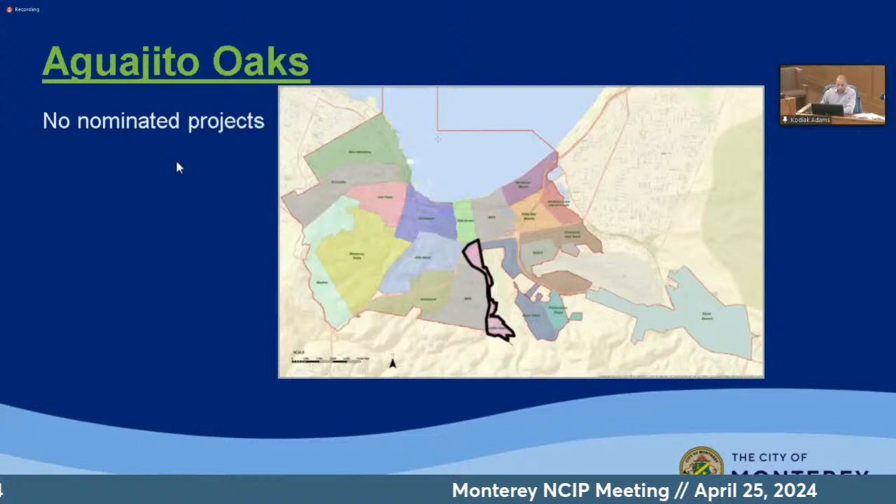All right, so there are no projects in Aguajito Oaks. So Alta Mesa, there's 1 project: the installation of a sidewalk at Alta Mesa Road from Alta Mesa Circle on Alta Mesa Road up to El Dorado, roughly 800 linear feet of sidewalk at a price of $200 per linear foot, a rough estimate of $160,000. So this is the 1 project in Alta Mesa. Does that include the 8 ADA ramps? Generally, yes, that would be included. Okay, better than I thought it was going to be.

All right, at this point we'll open it up to the general public for input and comments. Any member of the public who wishes to address us on it, please come forward and state your name.

My name is Valerie Morrow, and I'm the person who petitioned for this primarily because I live at the juncture of Alta Mesa Road and the Circle. I've only lived here 4 years, and I've been appalled at the velocity with which people drive up and down the street.

We live in a neighborhood, Rick lives in the same neighborhood I live in. We're primarily elderly people, and people walk their dogs. I'm elderly, we're older people, okay? And I was just so shocked to see that there was no safe place for anybody to walk on a thoroughfare as busy as El Dorado is.

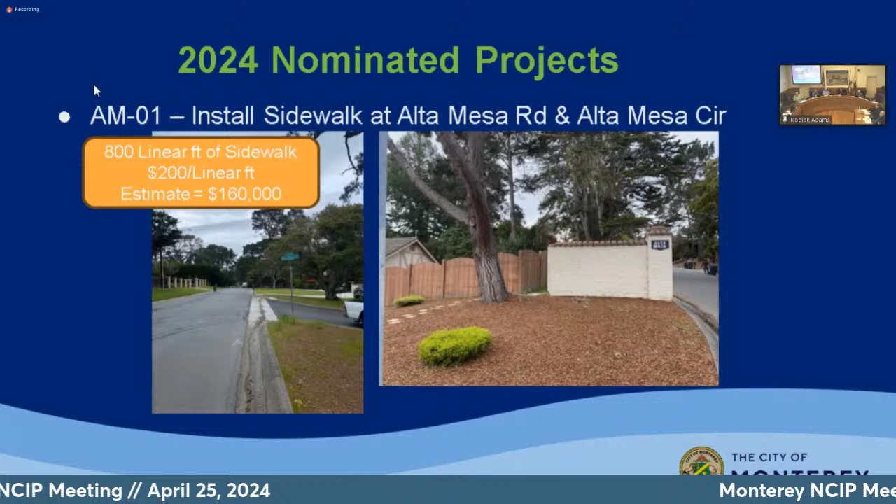Yes, there are 6 projects in Casanova Oak Knoll. Also, before we start, just so you know, there is no action actually tonight on the rest of it, so if you wanted to go home, you know. It's just discussion. I didn't see you rushing for the door, so I wanted to make sure you're going. Okay, go ahead, Reggie.

Yes, there are 6 projects in Casanova Oak Knoll, and 4 of those are sidewalk projects. One is a duplicate, and at the request of Richard, we're combining those sidewalk projects. So COK 01 is a sidewalk panel along this space here.

It's 5 foot, roughly $1,000, a patch of concrete. A 70-foot section here at Casanova Avenue and Melway Circle. Then the third one is a little bit longer, roughly 110 linear feet from this driveway to the curb at this intersection, for $22,000. So you have a total of 185 linear feet of sidewalk, using that rough estimate of $200 per linear foot, so that's $37,000.

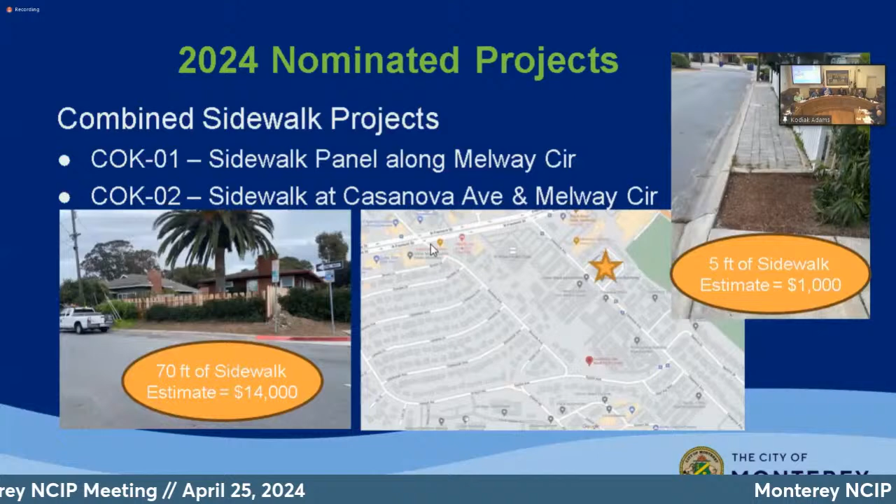I do have one question for Reggie on COK 3. Reggie, does the estimate include putting a new curb in? Are you going in the street or cutting into the hillside by the trees? We don't have that level of design yet.

Okay, I understand. But if you do go in the street, I think the estimate - if you have to put a new curb in - all the neighbors affected by these sidewalk projects have approved them. So if you need that in writing, our volunteers will do that. But they're all approved. From what we can see of the slope and the trees, you may have to jog into the street about 5 feet and put a new curb and gutter in.

But the people on Stewart, the complaints are coming from strollers and handicap access. If you look at the street above this area, you can see they either walk in the street or have to cross without a crosswalk to get to a sidewalk on the other side.

The radar sign - it was well pointed out that the poles are already there, so we should be able to get it a little cheaper than the $12,500 per sign, since there's no concrete, no pole, no labor, you merely clamp on a new sign. Not sure how well they work, but they're good at identifying the time of day when there are speeders so we can get enforcement, especially if there's a timer that records. I don't know if the new signs do that.

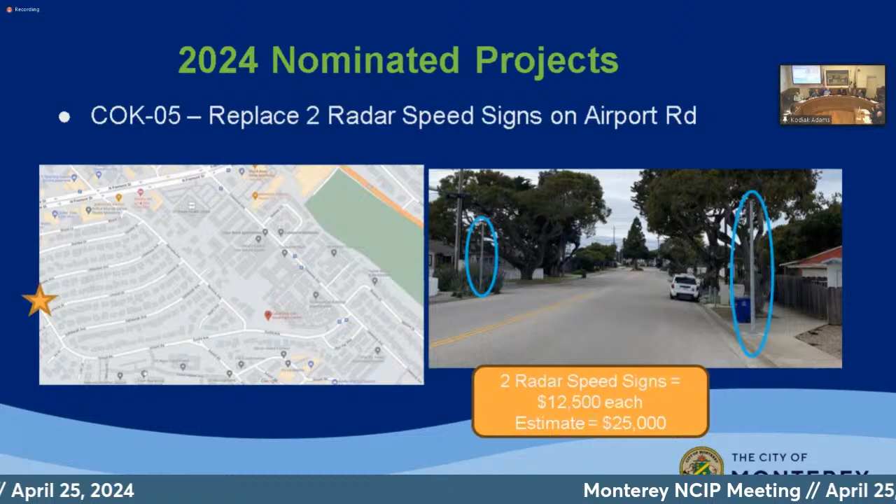The GAP project, I have some news. I did call Regional Parks and they've endorsed the project. The city last year put in for the construction grant, but we didn't win that. Full construction is 2.1 million.

Now TAMC has taken over the grant process for this project. They have twin bike lanes, one on each side of Laguna Grande Lake, that go all the way to Del Monte, connecting to Fortag. They're also including the GAP in their grant proposal, so hopefully this amount of money might encourage the grants to see community support and give us that grant.

This is desperately needed to get access for pedestrians and bike riders. We're an island, we have no way out other than through traffic intersections, driveways, and freeway ramps. These bike trails are essential for safety.

I think that pretty much covers all of Casanova. So that's about it, and just let the rest of the committee chime in if they have any questions - be happy to answer if I know the answer.

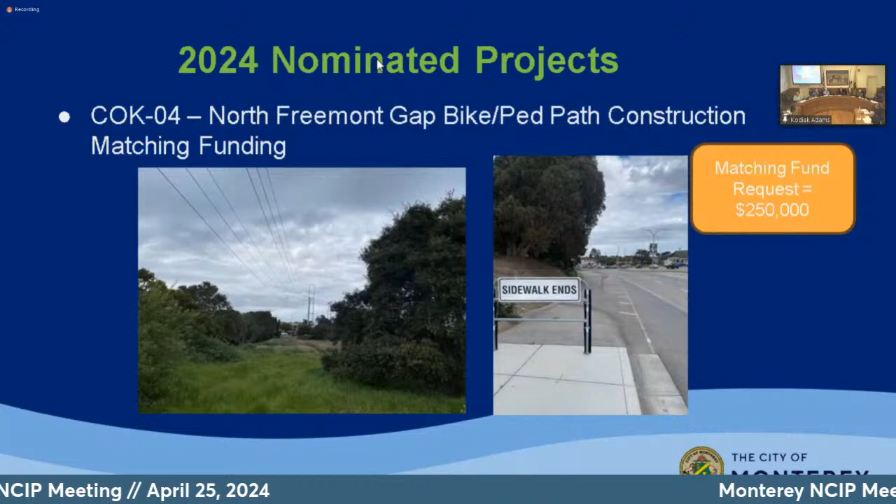Yes, there's two projects in Deer Flats. DF01 is to install an electrical disconnect in the neighborhood entrance planter, with a rough estimate of $5,000. DF02 is the Old Salinas Highway pedestrian signage and lighting project, with an estimate of $85,000. Those are the two projects in Deer Flats.

At this point, we'll open up to general public for comments or input. If anyone wishes to speak on the Deer Flats projects, if you're online, please raise your hand, or you can come forward if you're in the council chambers. I'm not seeing anyone raising a hand online or coming forward, so bring it back to the committee. I know Dave is not here, so does anyone else have any other comments or questions on the Deer Flats project?

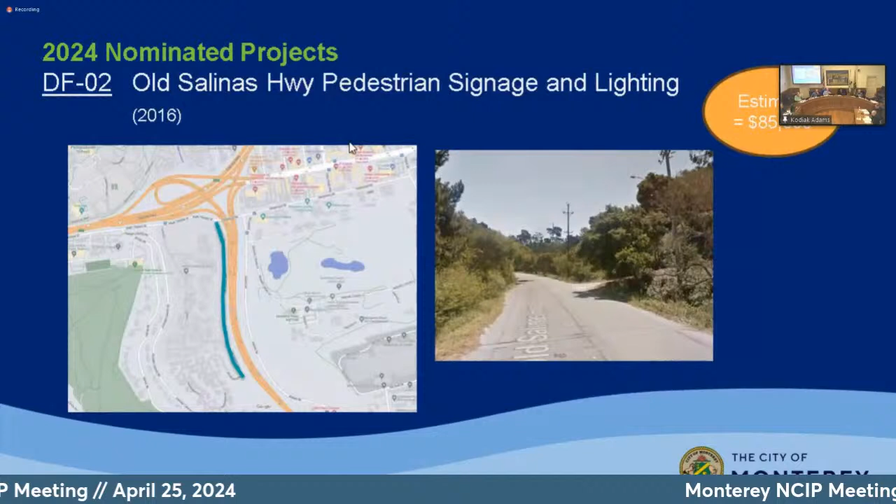Seeing none, let's move on to the next neighborhood, which would be Del Monte Beach. All right, and yes, Del Monte Beach has 7 projects.

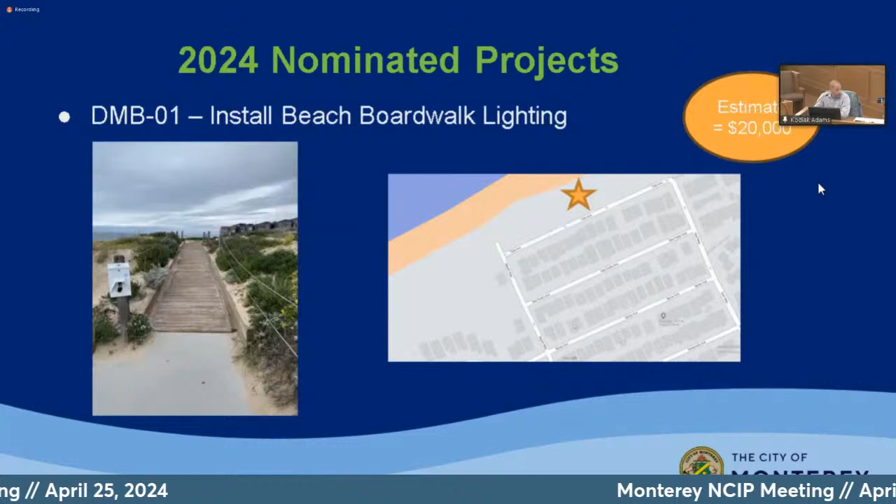Del Monte Beach 01, install beach boardwalk lighting, estimate of $20,000. Del Monte Beach 02, take a toy, leave a toy box, estimate $1,500. Del Monte Beach 03, Monarch Butterfly Garden, roughly $1,000 for material. Del Monte Beach 04, Beach Dune Restoration, estimate of $35,000. Del Monte Beach 05, beach bike racks in the parking lot at the end of Tide Avenue, $20,000 estimate. Del Monte Beach 06, repair and replace metal cable railings along the boardwalk, estimate of $30,000. And Del Monte Beach 07, Beachway restroom facility and/or Portland Loo, rough estimate of $1 million. Those are the 7 Del Monte Beach projects.

Okay, we'll open up the public comment portion on the Del Monte Beach projects. If you're online, please raise your hand. If there's anyone in the council chambers who wants to speak to the Del Monte Beach projects, please raise your hand so I know. I'm not seeing anyone coming forward or raising their hands in the council chambers.

There is one online. Jill Johnson, if you could unmute her, go ahead please. Hello Jill, are you there? Go ahead, Jill Johnson. Go ahead, should be unmuted.

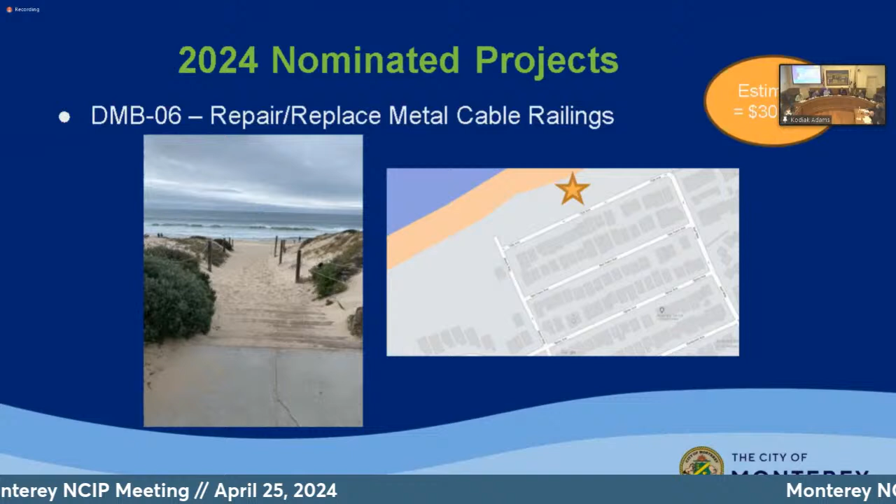I will say they're intending for cabling. There wasn't a request for split rail, but the neighborhood likes cable more than the split rail, so that's the priority on that one. Number 7 was not an active project in the neighborhood, and I guess I can't say anything anyway.

Any other member of the commission have any questions or comments? Richard?

Yes, I see we have a restroom for $1 million. I just wondered if Reggie can tell us what the status of the restroom study is. When is it going, and when is it going to be finished?

Oh, Richard. So I guess I was saving the bad news for last, so you're gonna make me give it early. We are not moving forward with the restroom study. The city has made the decision that the restroom study is not necessary and that it's not a good use of funds, and we are not moving forward with the restroom study. So that's the update on that.

Gee whiz, kind of what NCIP thought at the beginning, that we didn't need a study. And the city wanted a study, and the council approved it. Right, I just, that's all I'm gonna say on that. Okay.

All right, so then all the restrooms proposed are up for a vote then. Yep. Okay, and the council's going to vote on this? The council has to vote on it, yes. No, I mean, the council nixed the restroom study. Has the council formally deappropriated the funds? Not yet, but will they have to? Yes, that will be a requirement. Okay, thank you. That's it.

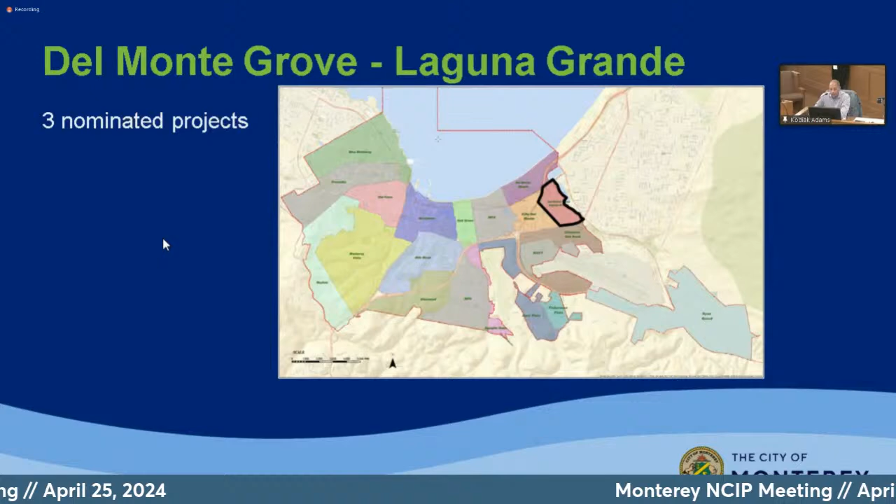Yes, all right. There are 3 projects in Del Monte Grove, Laguna Grande. Improve the sidewalks along North Fremont Street for safety and beautification, estimate of $250,000. DMG 02, purchase of land at the 500 block of Casanova Avenue for affordable housing, with a specific request of $4 million. And then DMG 03, exercise equipment at Laguna Grande Park targeted towards the elder community, with an estimate of $60,000. Those are the 3 projects for Del Monte Grove, Laguna Grande.

So did one of them get... Right, so we had a withdrawal.

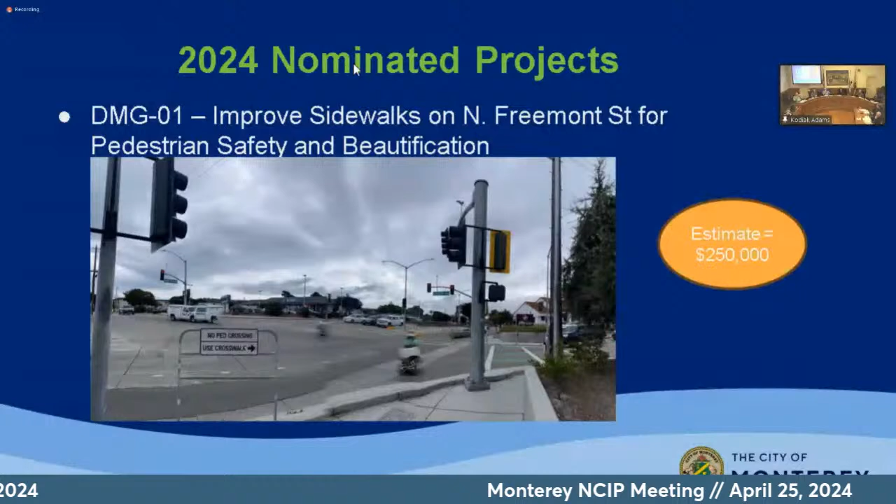Any other comments from commission members? Okay, seeing none, let's move on to downtown.

Yes, I think there was at least one withdrawal in downtown, so I think we're at 22. All right, downtown projects: install a stop sign at Webster Street and Camino El Estero.

As I think I've said prior, we have a project on the books and in the works to put a rapid flashing beacon at this intersection.

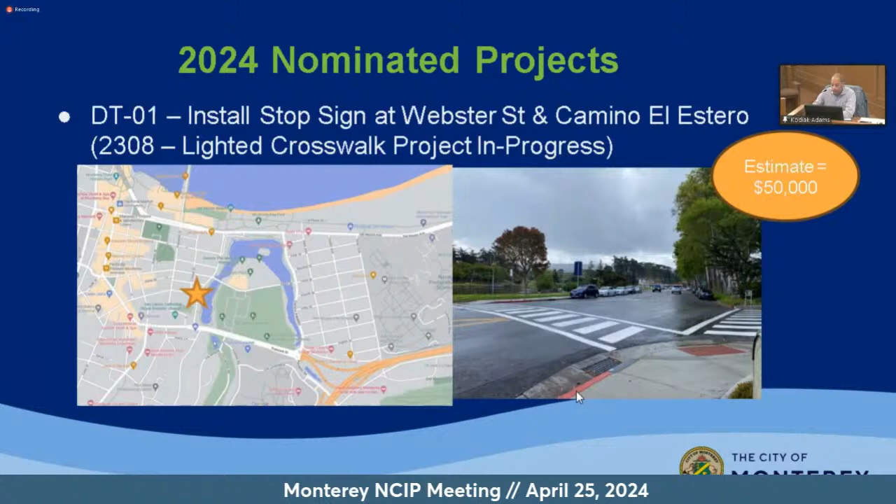DTO2, Dennis the Menace Playground video surveillance, rough estimate of $75,000, and this would be to monitor the Dennis the Menace statue at the entrance.

DTO3, this one was withdrawn.

DTO4, Jack's Field Park infield, outfield turf replacement. This was a Parks and Rec Commission priority project that they've identified as their number 3 priority for this year. There's a lot of back and forth on this, and I think they just want to find a way to get it done.

DTO5, lights at Frank Sollecito Junior Field. This was a specific request for $175,000, and Parks and Rec voted this one number 2.

El Estero Park Barbecue Area Shade Structure, Parks and Rec Commission ranking number 5, and an estimate of $95,000.

Then number 7, one of 2 library projects submitted this year. This one is to do energy, lighting, and electrical upgrades, rough estimate of $500,000.

Second library project, DT08, for exterior upgrades to the library, rough estimate of $100,000.

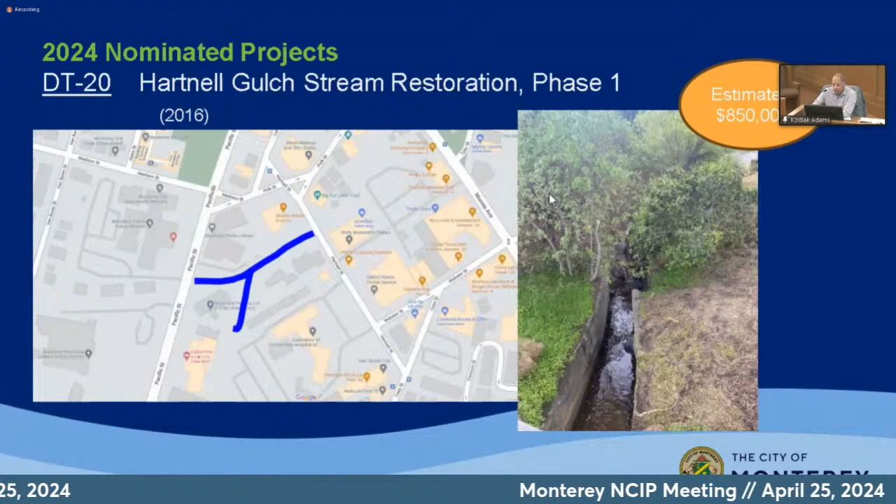DT20, so there's 2 Hartnell Gulch projects, DT20 and I believe 23. Together, estimate of $850,000. This would be to remove invasive plants and do some upgrades to the walkway and park area.

DT21, Lake El Estero Lake Edge improvements, phase 5, and there's prior projects that have been done along the lake. This estimate is $300,000.

DT22, Eldorado Street 100 block driveway reconstruction, estimate of $30,000. I think that's the end of the downtown projects.

At this point, we'll open up to public comments. So anyone who wishes to address the Committee, please come forward, and if you're online, raise your hand.

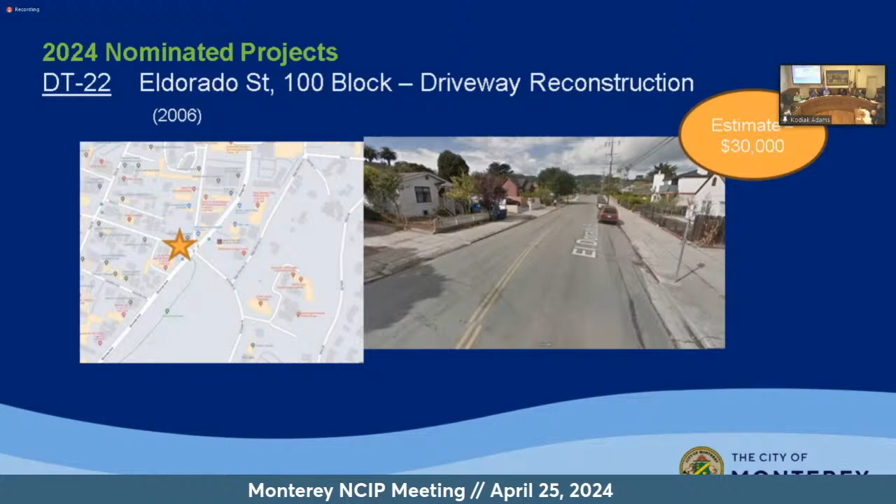Hi, I'm Ellen McEwen, Commissioner for Parks and Recreation. I just want to speak about 4 items on the downtown area that are of top priority for Parks and Recreation.

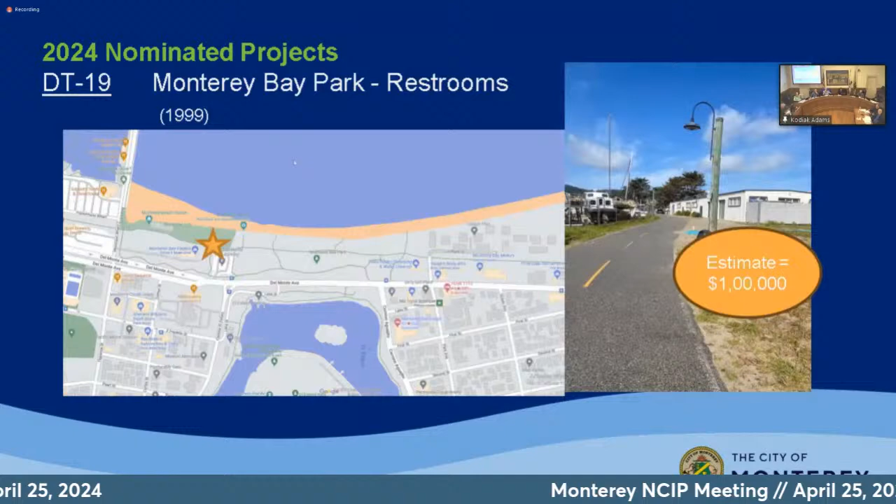Our number 2 priority was to replace and install new light poles at Sollecito Field. The lights and light poles are 30 to 50 years old, an old system with ballast and fluorescent tubes, and they're very hard to get bulbs for now. We spent $4,000 to $5,000 last year just on bulbs trying to keep this system jury-rigged together. It's not a real exciting thing, but it would be of great benefit to the athletes because the lighting would be better directed on the field with a new LED system. It would require less maintenance, and there wouldn't be those blackout areas where things don't show up well. In addition, there'd be less light pollution because it would be better directed on the field. So that one we're very much interested in.

DT4 is to replace the irrigation and drainage system and install some kind of turf. It can be natural turf, cork, or sand. This is at Jack's Park. It's in super poor shape right now. This is where adults play and girls' sports gets played here. Just to keep things equitable, we really do need to upgrade the Jack's Park infield turf.

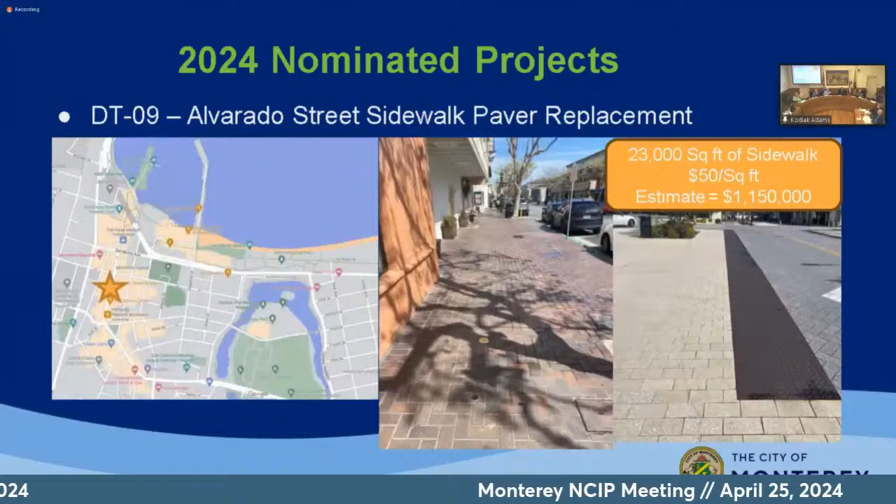But I do have a couple questions about the tennis center project. One, we're being asked to replace courts with pickleball, which is a great idea, but you have to pay to go there. I'd like the city attorney to reply on NCIP's fiduciary obligation - are we subsidizing a business? This is a unique situation. The other question was, if we have it accessible for pickleball, do we need to build the one at Ryan Ranch? We never got that answered. But I don't know if there's resistance to paying $5 or $10 to play, or we got to spend millions to build a new court. It's something we should ask, and I think we should know before we vote.

The other is the mention of the barbecue shade, the barbecue area at El Estero. I've done large parties there. Let me tell you, you put food on the table, trying to feed a couple hundred people, and seagulls are flying over. Don't eat that potato salad, please, because you're not going to know what's going in it.

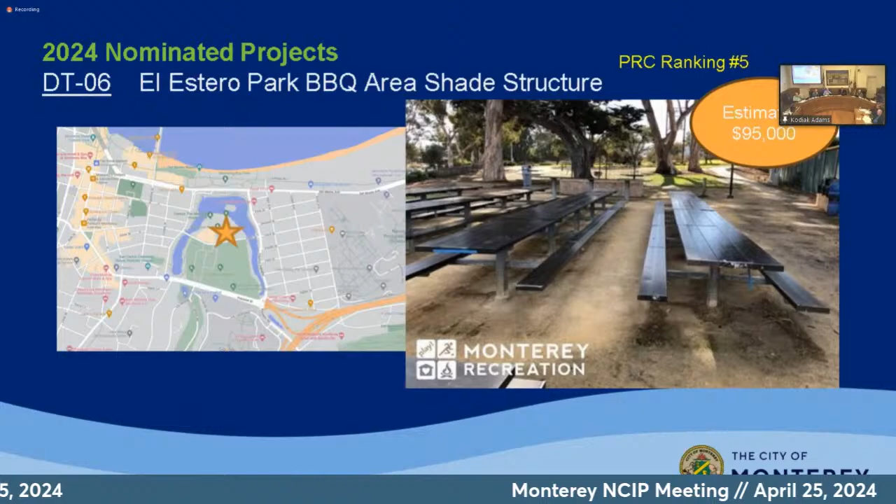My last comment is, when I found the Portland Loo many years ago, they literally cost about $80,000, battleship grade stainless steel. The city put one up at Simoneau Plaza right after I came up with the idea, they jumped on it. The only difference is they painted it, which kind of defeats the purpose of steam washing graffiti off battleship stainless steel.

But including the shipping, it was less than $100,000 to get here. Then you got to add the pad and the sewer connections, power, all that stuff. They come with power sprayers on them, so maintenance can power wash off the walls and floor drains. But when we looked into this, it was half the cost of a stick-built or concrete block restroom. So I don't know how it got turned around, and that was 10 years ago. But I think Jamie called the company at my request, and she was briefed on it too.

That's the reason we wanted the study, because some people were asking for 2 or 3 of them, and we had no idea what the demand level for each proposed location is. I guess we'll have to figure that out voting night, but it should be substantially cheaper.

It's anti-crime, easy maintenance, a way to deal with graffiti that stick-built structures can't address. That's the reason you see the vents on the bottom and top, so when police go by they can see how many feet are in there, telling them somebody's dealing drugs or mugging somebody. But a woman can bring a stroller with kids' bicycles inside and lock the door. With an open-door stick-built restroom, you can be followed in and become a victim. Those items should be considered as we vote on these different restrooms.

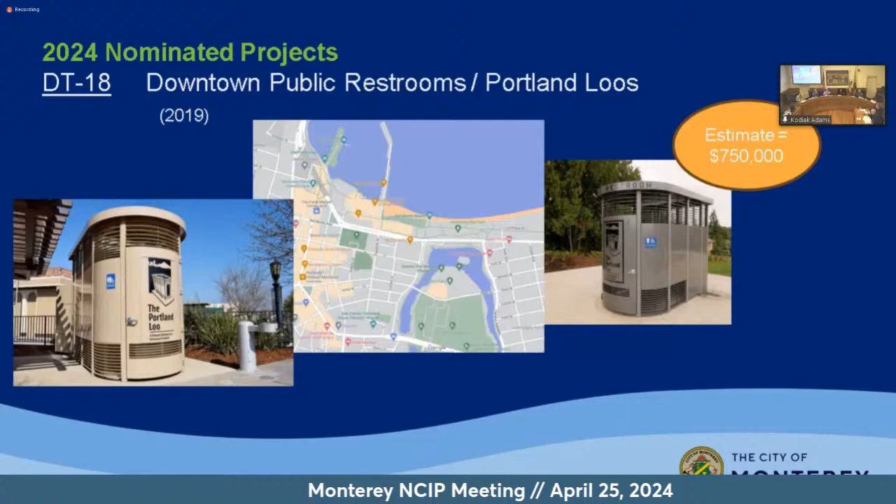DT02 is the statue for the park, Dennis the Menace Park. I don't know whether it's the city manager holding it up, somebody's blocking it. Why is the statue not back? It should be there, it's Dennis the Menace Park, it's famous, nationally famous. So why aren't we putting it back and why isn't that a high priority? I had recommended this to the Parks and Rec Commission and they weren't interested. I don't know what the Parks and Rec—we heard the lady from Parks and Rec, she's already left—but I can't figure out why they're not interested in getting the Dennis the Menace statue back. I would think if I was on Parks and Rec it would be a high priority.

The other thing is, I drive by going from my house to the office every day and back, and I always look to see if the fountain in El Estero is still there, because it wasn't working not too long ago. They got it working, but I always wonder if it's going to continue working. And if it's sinking, I think it would be wise for us to put whatever it takes to get it back up and in operation.

Yeah, just to chime in on the Dennis the Menace statue—that price tag for what was described as video surveillance does seem excessive. I'm curious if the people who proposed this considered other opportunities to solidify it in place, maybe filling it to make it heavier so people can't just take it and run. In terms of a long-term solution, I'm also curious how many years this would actually provide compared to the response of the video surveillance as well.

Jamie, do you have a final comment? I would just remind us all, these are very, very rough estimates, so don't make a decision on the exact dollar alone. The concept and the utilization are all important.

Okay, I'm going to wade into pickleball. I've got a concern, I think it's the one Richard brought up, of the Monterey Tennis Center, where you're going to have to pay to use it, and we'd be fixing it. So to equate that with the open, public, free-to-use facility, to me is not a comparison. Doesn't mean I don't like the idea of having pickleball courts there.

My bigger issue as it relates to pickleball—and I see the smile happening on Reggie's face because he knows what's coming—I have a major issue when the city manager takes it on himself to basically, for lack of a better term, kill an approved and funded NCIP project. We funded a design at Ryan Ranch. We have no idea what construction cost would be or anything else until a design is done, and there's no guarantee we're going to fund construction once we see a design.

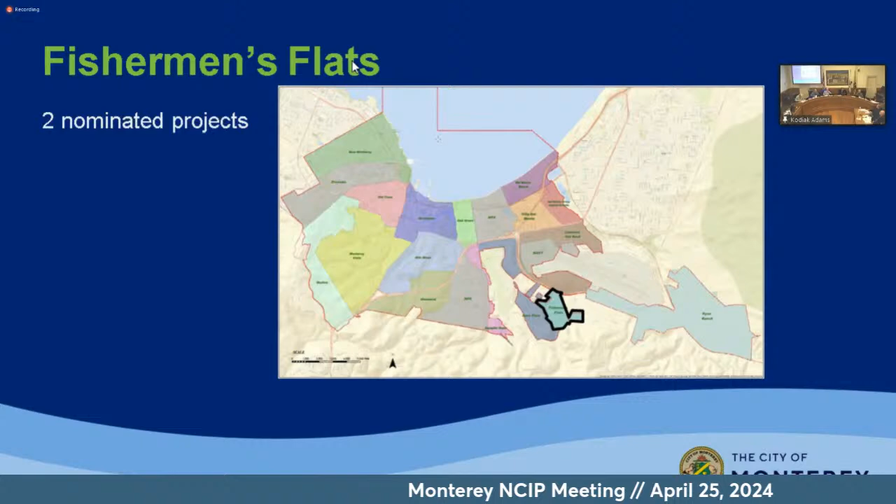All right, so we're moving on to Fishermen's Flats. The first one is Greenbelt Maintenance in Fishermen's Flats, a specific request of $100,000. The second is the Via Maritimo Streetlight, estimated at $30,000. Those are the two Fishermen's Flats projects.

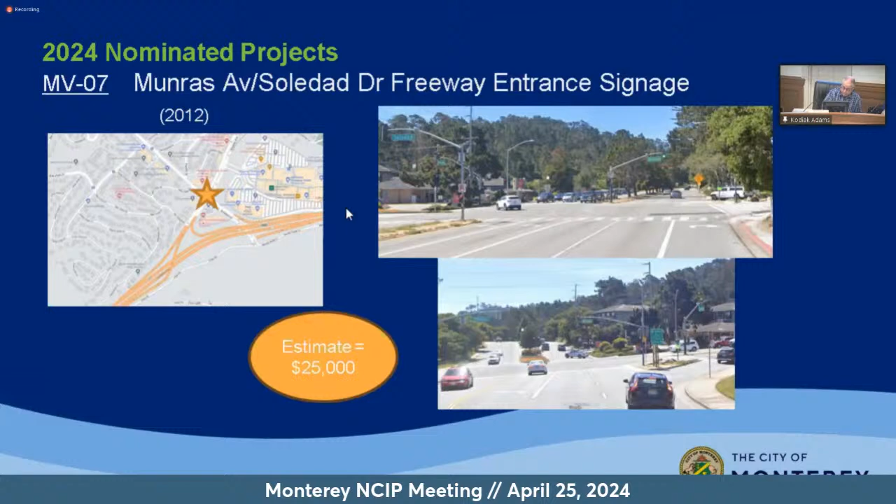If the freeway sign entrance was a really old project, I don't see anybody really pushing that. That was like from '06 or something, or 2012. Well, it was resubmitted, but it's been around a while. I'm not sure, we'll see where that phases, but I don't think there'll be a lot of support from the neighborhood for it.

And the last project, the Mar Vista traffic calming phase 1, we'll see where that goes. There's been debate about moving that intersection where it was initially designed at Toyon Vista, to move it down to Via Gayuba, which is another one. And my question for you is, is that design as far along as the one on Toyon?

The other thing was there was a question on bulb-outs, whether bulb-outs needed a light. And since there's no electricity at this intersection, this is where all the wiring runs through backyards. Do you still need wiring to go there, and what kind of lighting would be needed? People don't want real overhead lighting, they would prefer, if lighting were needed, low bollards or similar lighting. I don't have any of that specific design information, we'd have to work through that.

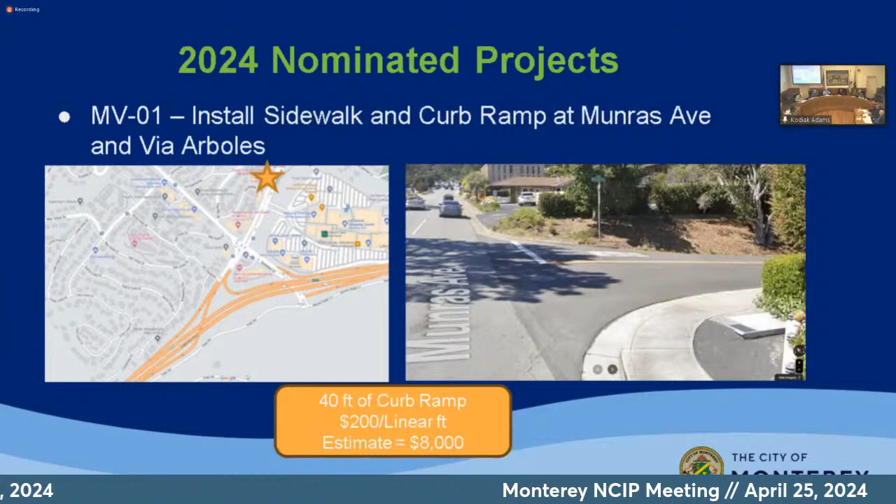And then number 2, we have a precedent of not engineering our own traffic calming. And I know this because I had to pay for a traffic calming study, and then they ran out of money, so they couldn't do the calming. So when I look at MV02, that has to be in a traffic calming plan before we do it, no matter how good an idea it is.

Well, that's where we do have a traffic issue in the traffic calming plan, and it suggests putting an island there in the street. And this is my question, is that island allowed, or are we not allowed to engineer our own solutions? We need to stick with the plan, see if the fire department can approve it. There is an approved traffic calming plan for Monterey Vista, but it has elements that are already predefined and have been discussed and evaluated, and one of those is a traffic island at this location.

Okay, but what I heard, okay, so are we asking for the island? Because I thought we were asking for something else that wasn't the island. Well, because islands on Martin were nixed by the fire department, the project became: what can we realistically do for traffic calming? So it was broadened to what can we do. So my suggestion would be, the first question would be to the fire department: can we put an island there?

It might be different conditions than Martin's. It could be we don't like islands, in which case it would need to be a new design element to change the plan. Or what can we do? That's part of what residents want, to figure out what's best. I think the project is for us to figure out what can and can't be done, given the traffic and all that. That's what we did in my neighborhood - we took it back, got the officials to figure it out, and then moved forward once we had.

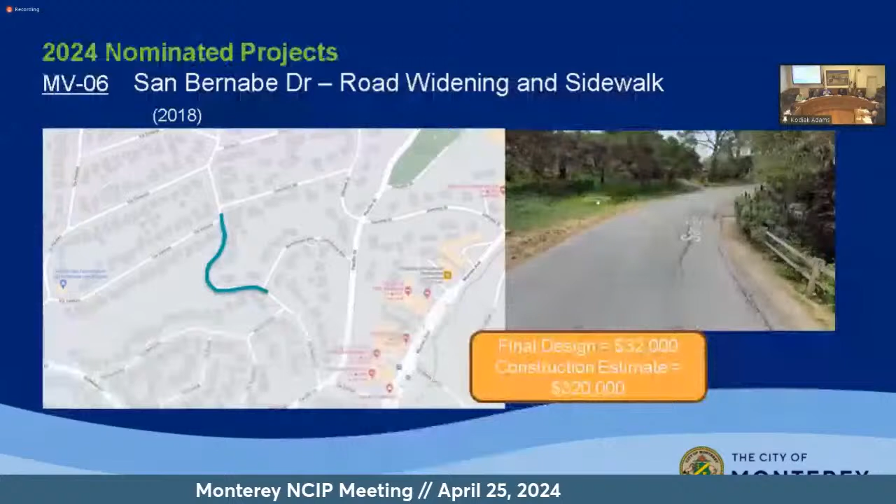Now here's my third question. I heard at the last meeting on MV06 that 6 out of 10 were in favor of this. My question is, if it's in the traffic calming plan, do we not have to get specific approval of the affected residences?

MV06 isn't really a traffic calming project, it's a sidewalk installation. But in order to do the sidewalk, you've got to widen the road to have a place for it. It's really a 1.5 lane road that's been around for a while - you have to make the street legal to begin with. So the street needs to be widened, and because you're doing something on the street, you have to make it legal. Then that falls into whatever our rules are about who has to approve it. I wouldn't call this real traffic calming - in fact, cars will probably drive a little faster once they have a real lane and don't have to worry about head-on collisions.

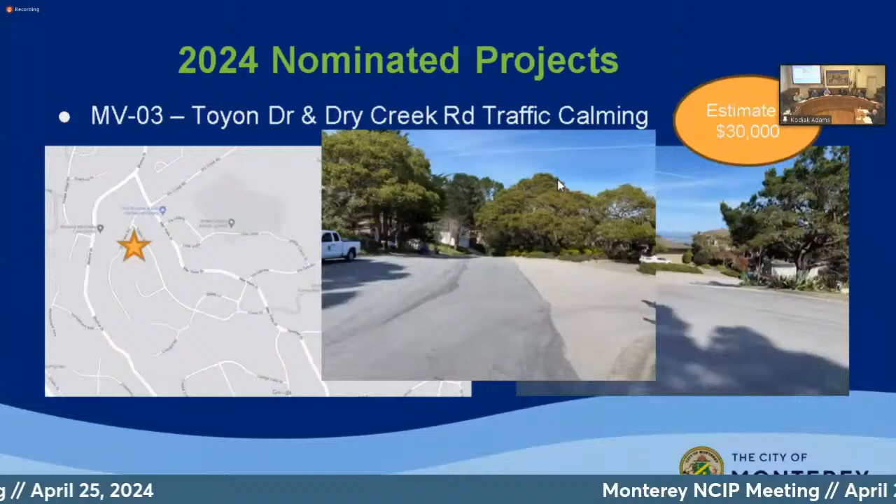On traffic calming, we had a consultant come in and spend time on recommendations for our neighborhood. We have curves, hills, and limited visibility, and what we found out is they don't make sense. We turned them down because it would actually make it more difficult - with the curves, now it's open and you can see in all directions. You have to be very careful because the traffic calming guy only looks at things in two dimensions. We couldn't get him to drive the neighborhood and see what we were talking about. The actual traffic engineer was on site at the meeting with Reggie and the residents, and we found out we had to turn down what the traffic calming expert told us.

No, we didn't love it. I think at this meeting Reggie can attest the residents were really happy with what the designer from Whitson talked about - that was San Bernabe Drive. I think everyone was pleased in that instance. I was talking about where you're trying to put islands in, up where you have Mar Vista - you have limited visibility there, you can't really see. You have an open intersection, and if you start putting things in the intersection, that's something cars will hit. It's a tough intersection when we're trying to look for solutions.

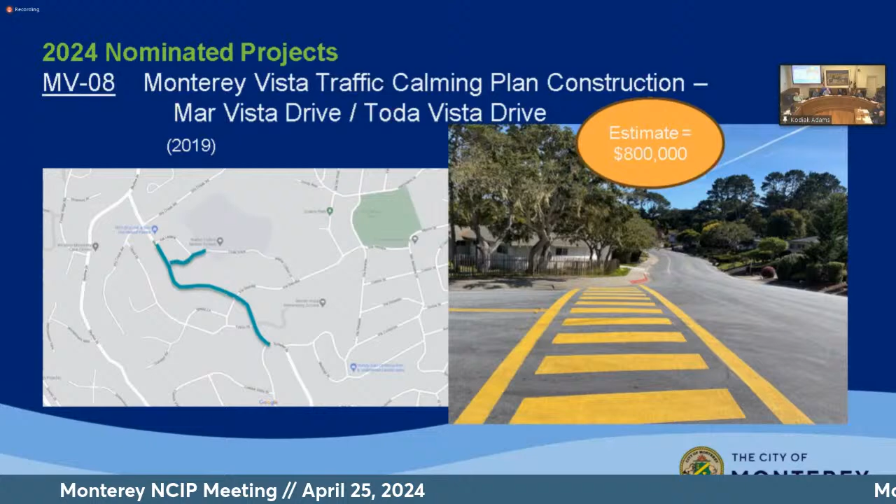Just for clarification on the costs for MV06 - design is 32,000 and construction is 320,000. That was my back-of-the-envelope estimate, but I'll go back and reconfirm it. I do know the final design number is 32,000. So the remaining total would be 352,000 rather than 320,000. Dennis is telling me it's going to be a lot more than that - we've had estimates here before that were off, so I'll double check it.

Islands don't work unless you've got a really wide street to work with. El Dorado in our neighborhood is a perfect example - it's a winding street with islands, and people still speed through there. I have a question for Reggie on MV7.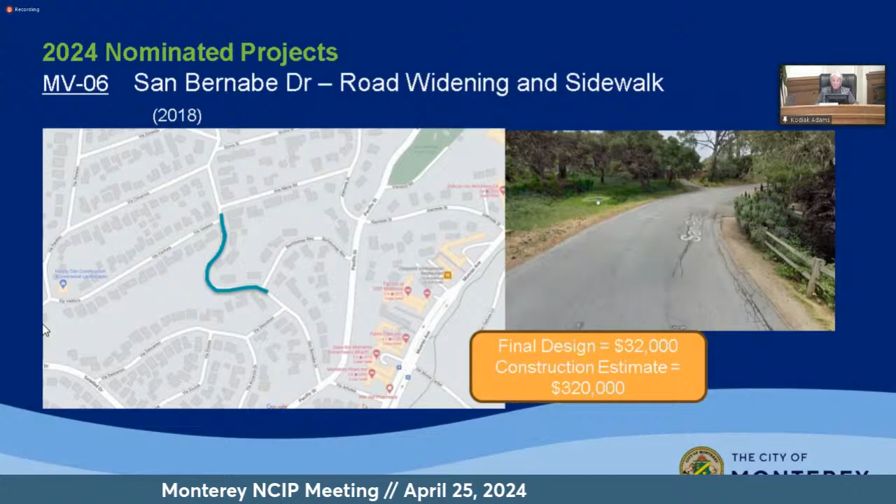$250,000 for two signs or one sign? One sign. Is it 25? 25, not 250. It's 25,000. Okay, my mistake. I was going to say, is it gold? Platinum.

Can we do that in-house? I don't know the answer to that. We'll have to look into it. Okay.

Any other comments or questions? I don't see any hands raised online, in which case we're done with item 3. Let's move on to item 4, Wyndemere Canyon projects discussion.

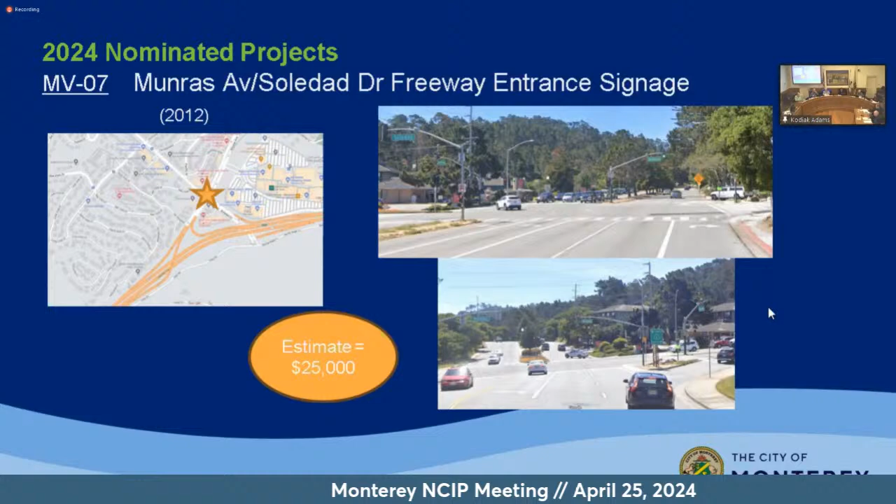Yes, so this was a specific request at the end of last meeting. So I guess just for everyone's general background, Wyndemere Canyon is a drainage item in Skyline, Monterey Vista, in that hilly area. Over the years, the city has done some improvements, as you can see here, what we call log drops. And there's some other items in this area, and then there's places where there's nothing.

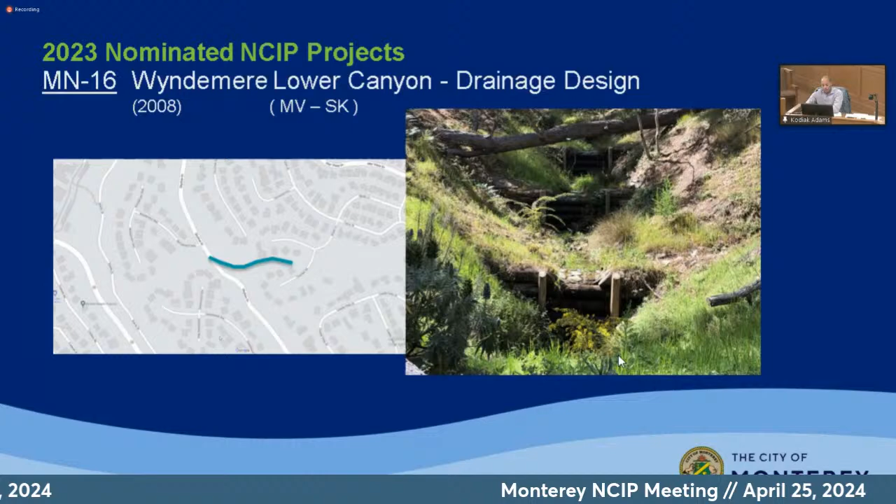So in 2020, there were 3 projects on the books with a value of roughly $840,000 to do some work, repairs and improvements in the canyon. All these projects, the funds were taken and the projects closed in April of 2020 as a result of the city council resolution to take the funds for city services and operation.

Between the last 2 years, prior NCIP rounds 23 and 24, the committee approved 2 projects, a larger one for $675,000. We've used some funds to date, and then $150,000 most recently last year, which currently totals about $823,000. So we've restored roughly 98% of that funding. And so that's where we are with the projects. So it's here for discussion.

As I said, it was specifically requested. So that's this report. Dennis, I believe you're the one who requested this, so.

My concern is the committee members, including myself, put in a lot of time on these projects to figure out how they should go and what should be done. Jeff Krebs and I walked the lower canyon, and at the time it was 30 feet of fill in areas that would be necessary to bring it back up to grade. 30 feet of fill, which has continued to be washed out, which is starting to create erosion, which is starting to impinge on houses, in which the neighbors in this neighborhood are very concerned that their house is going to go into the ditch.